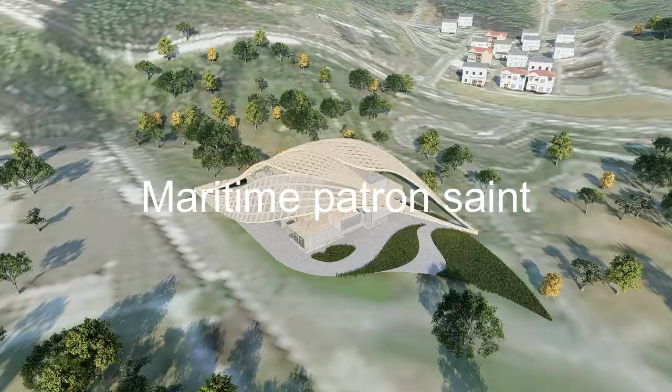To this day, the residents of Kamaishi are still affected by the natural disaster in 2011. Houses were destroyed, environments polluted, and the economy was also affected. Since then, the area has undergone a rebirth.

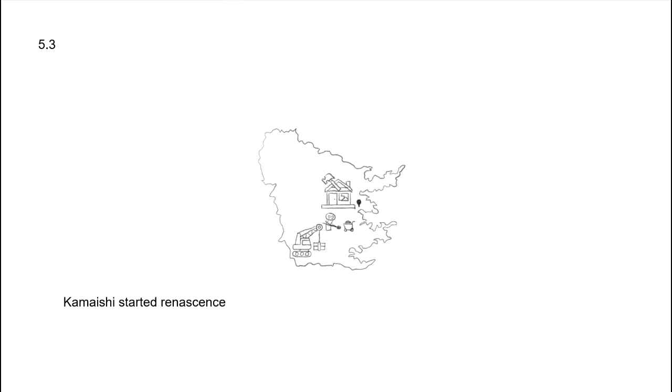However, fewer and fewer younger generations are choosing to live in the area due to the reminiscence left by the tsunami. The flow of people out of Kamaishi has resulted in a gradual decline in economy and the loss of cultural heritage locally. Our design aims to stimulate economical development by attracting and supporting the tourism sector, as well as building a wider community for the locals.

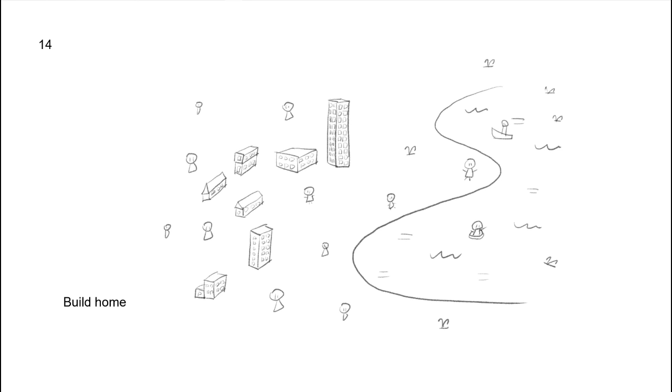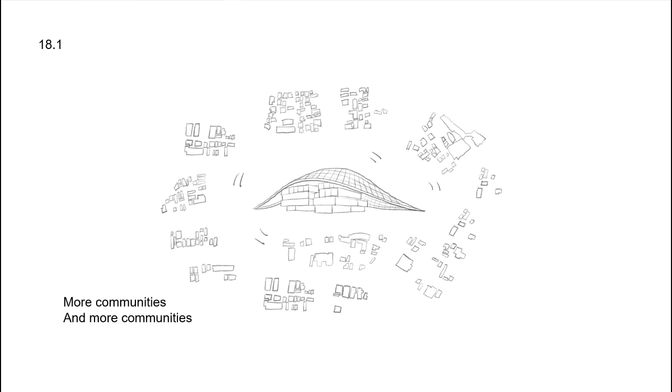Our design makes use of the regional trait of Kamaishi, the Toramai, which embodies local values and captures the essence of rural life. The blending of culture and tourism can be mutually beneficial. It forms a wider community where tourists can learn about the regional traits of Kamaishi, and the locals can develop a sense of belonging and identity.

With the key concept of regional traits and sustainability in mind, we extracted elements from the culture, business, and the surroundings as inspirations that run through the entire project. From a cultural perspective, we chose the Toramai. It is a traditional dance in Kamaishi and translates to tiger dance.

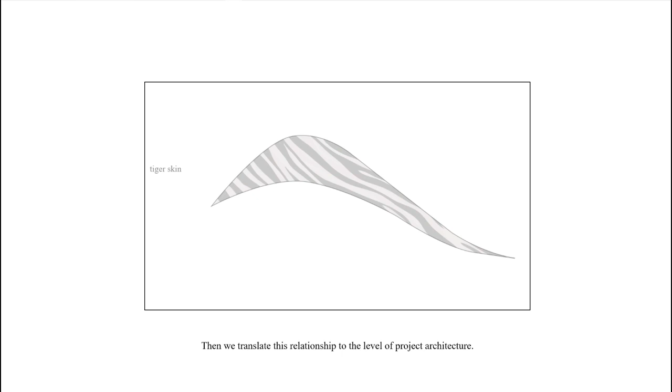During festive times, the Toramai teams can be seen throughout the day and night practicing and performing in the streets. They are accompanied by taiko drummers, bamboo flute players, and singers. Tiger dance groups will travel along the main streets, entering businesses, and will perform a short dance to people inside, and this is viewed as a blessing.

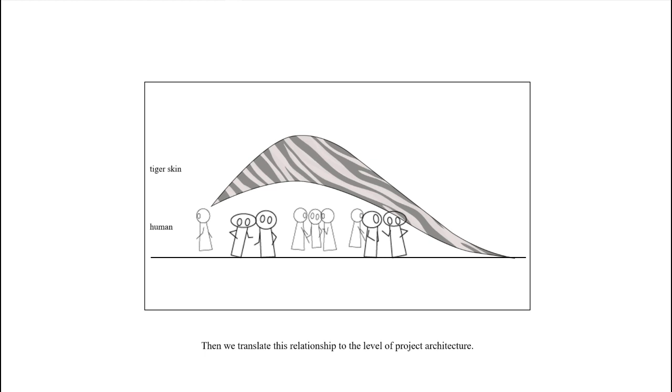The dance is performed every year around the 25th of August to offer blessings to the dead after the tsunami.

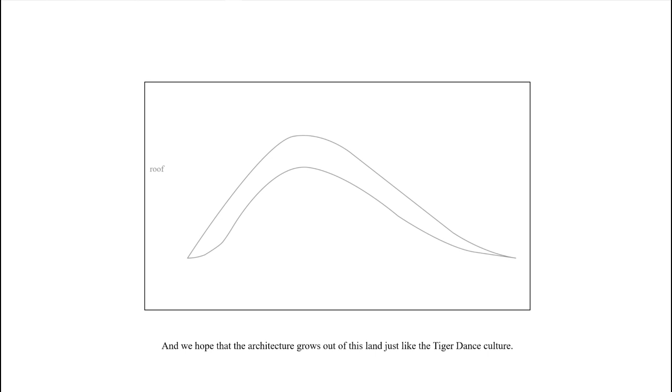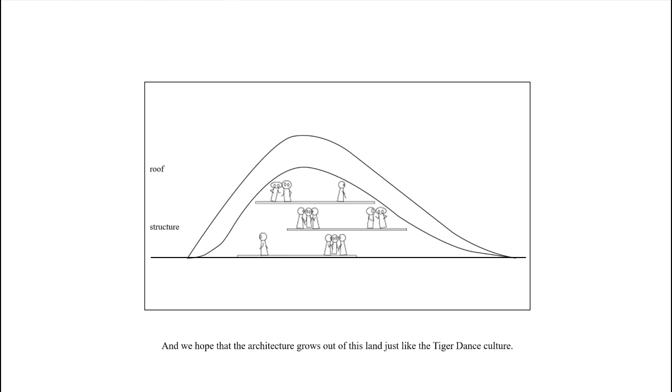We abstracted the relationship between the tiger skin and the performer in the Toramai as a dynamic pattern of a building roof. From a commercial point of view, since fishing has always been an important local industry in Kamaishi, we took inspiration from the weaving of fish nets as the roof structure of the building.

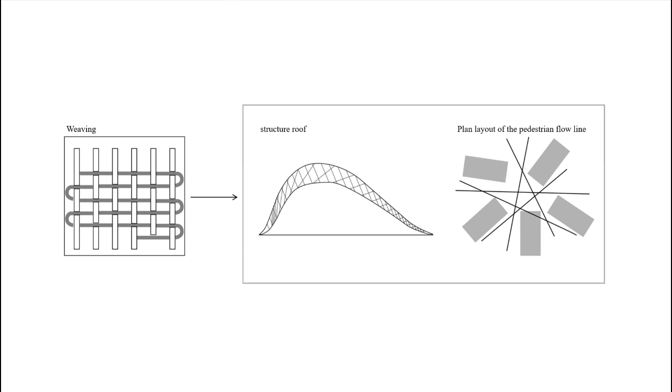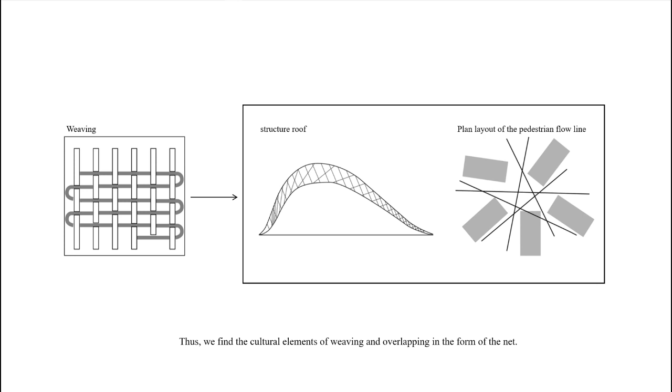Lastly, taking inspiration from the surrounding environment, we used the transport containers seen in the docks as the indoor architectural space. Here, AP can host educational events as well as hold spaces for equipment storage.

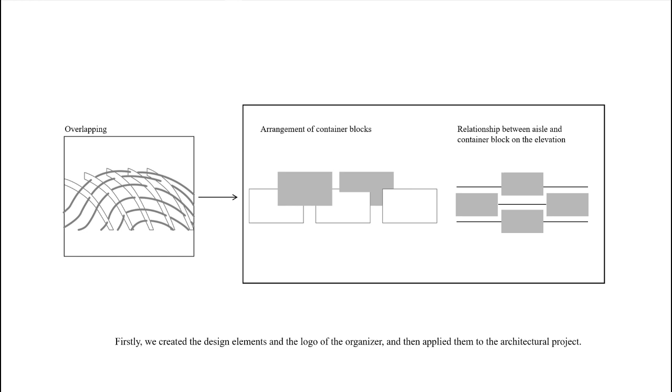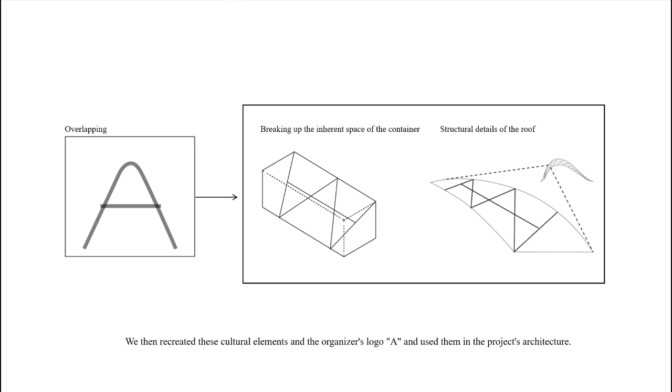Therefore, the interpenetration of the roof and the container will create many overlapping, multivalent, intermediary spaces. The roof exposes many openings in the building, where the interior is visible. So this approach not only increases the communication between the people, but it also increases the communication between the architectural space and the surrounding scenery.

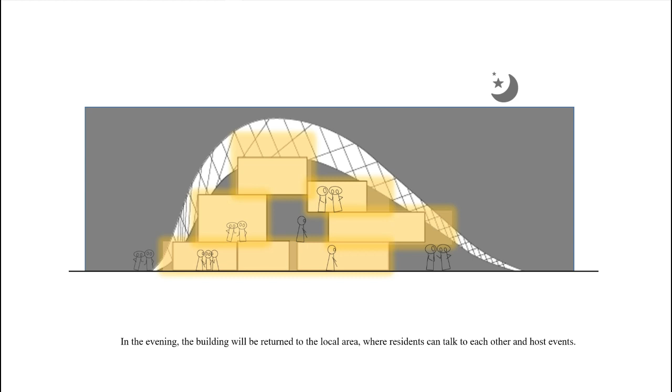In addition to enjoying the educational space inside the building, people can also feel the sea breeze and enjoy the mountain view in the intermediate space within the building. During the day, the building acts as a place for tourists to visit, learn, and experience. At night, it's returned to the locals where they can host activities and events.

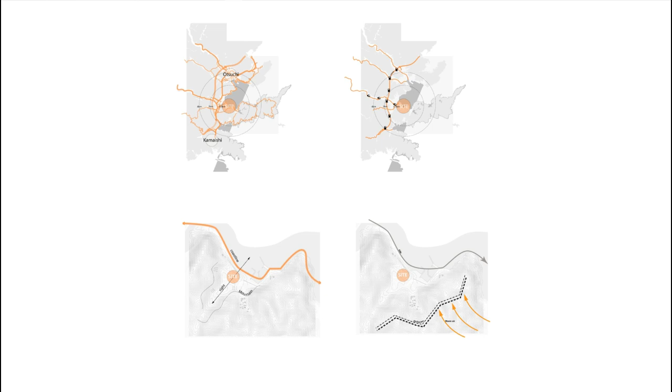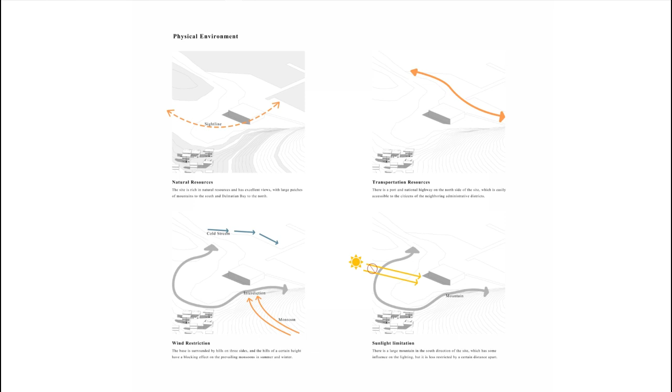Now I will explain the thought process behind how the building was constructed. The location of the site is excellent - it's low on the northeast and high on the southwest with a flat terrain. So what this means is that it offers both mountain and sea views. Further, it's close to the main road, so transportation is convenient.

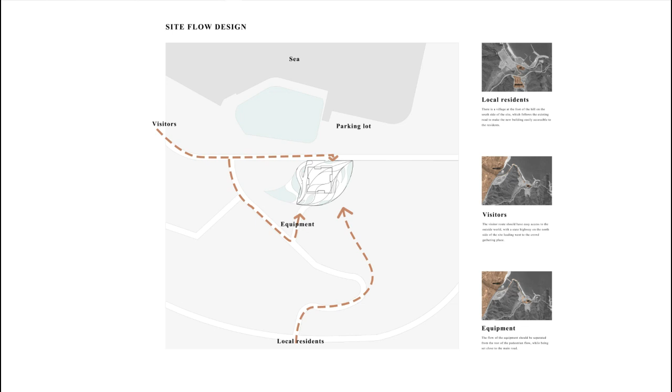And after careful consideration, we also added a branch road to the south side, so local residents do not have to detour. And this also separates the equipment transport from the road for the local residents.

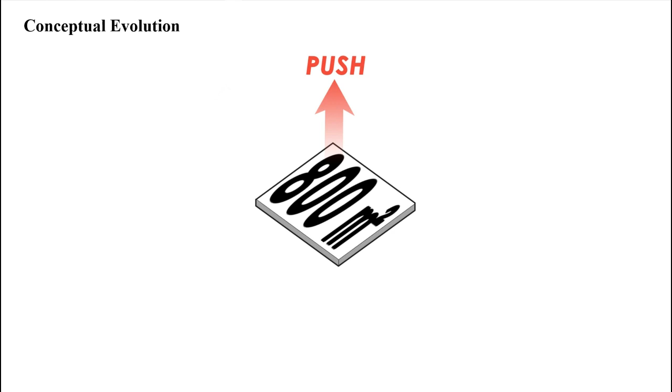From the building blocks, we consider two parts: the generation of the interior of the building and the evolution of the roof shape. So why was it a vertical distribution? First, the space was quite limited, and second, certain functionalities required a certain height to be satisfied.

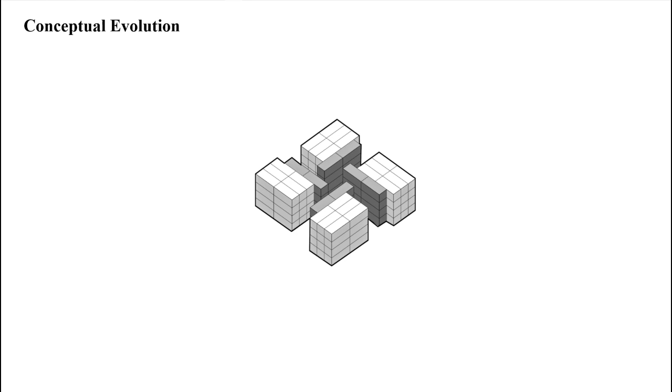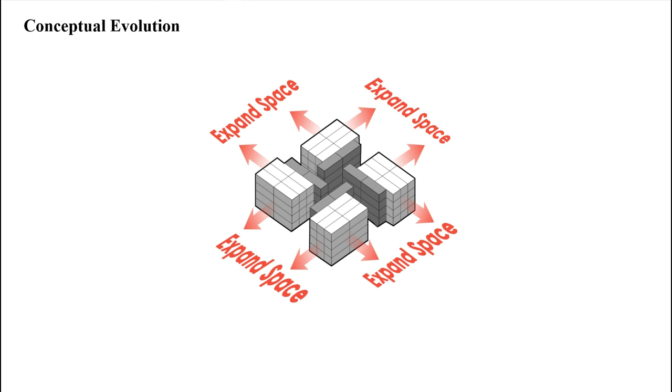So how is the initial building block generation considered? We believe that the volume of the building evolves on the basis of a windmill-like layout. This is done to form a core space where more people can participate. At the same time, in order to allow all participants to view the mountains and the sea, the volume was set back and misplaced, which makes the volume of the whole building look very rich.

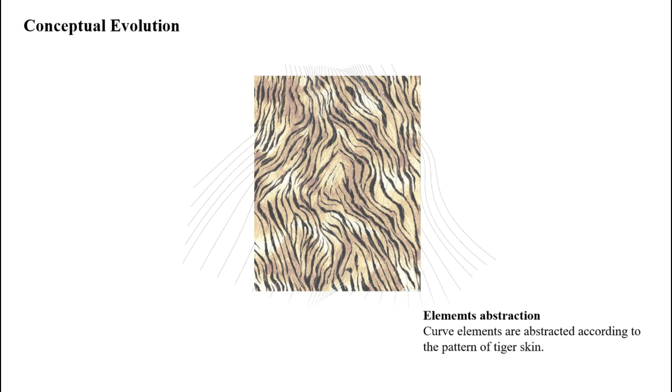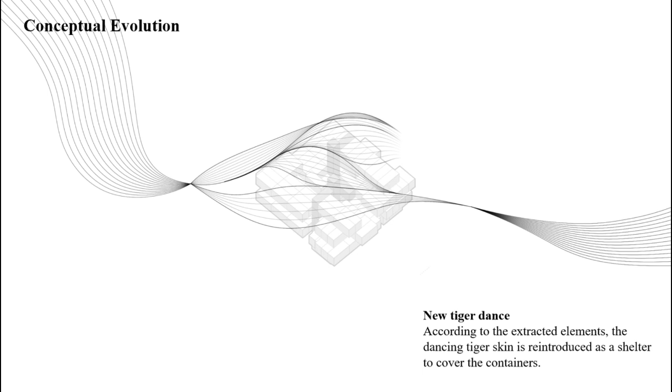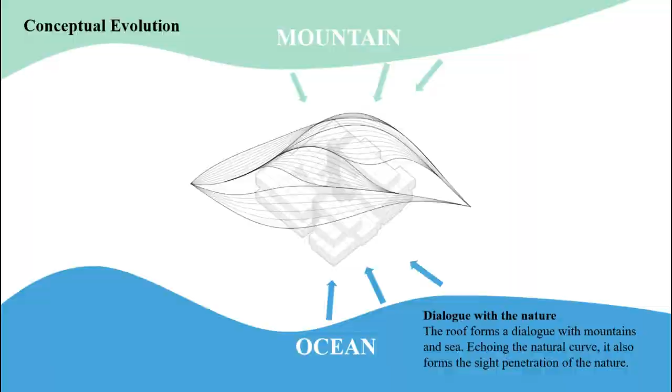So we chose containers because we want to adopt the concept of ecological sustainability and use containers of the uniform international size. The container itself is very strong - the load-bearing capacity is even higher than that of ordinary buildings, and it also has anti-corrosion and certain fire protection properties. The cost is cheaper than traditional buildings, and it can be reused without generating too much construction cost.

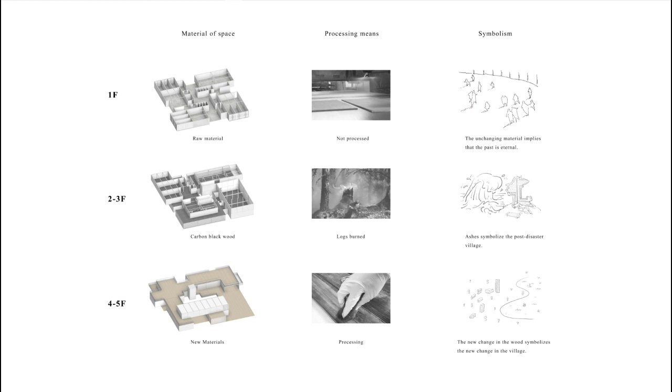In the choice of materials and the spatial distribution of the interior space, we try to use the narratives of vertical space to represent the surrounding history and the future expectation of place. Therefore, the three spaces we have divided are the equipment space on the ground floor, the education space on the first and second floor, and the tourist space on the third and fourth floor.

So we hope to use local materials to divide them so as to add a progressive narrative structure in response to the 2011 tsunami, thus allowing the vertical spaces to overlap.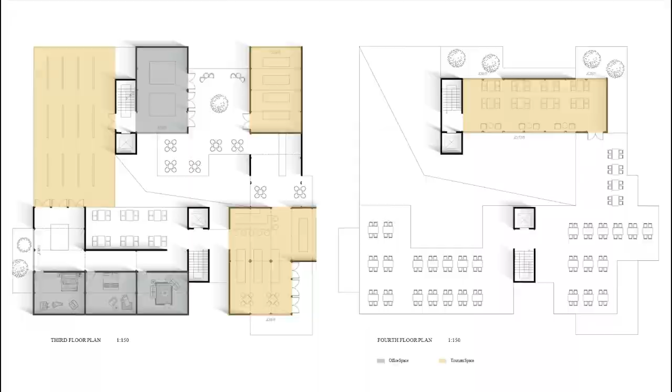For the ground floor, we wanted to use raw materials to abstractly translate the history of the local disaster in the area. On the first and second floor, we wanted to represent the current state of the area with fire-burnt wood, which left traces of damage done to the area.

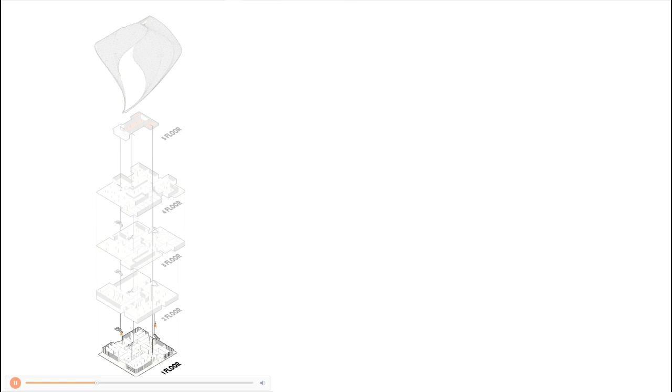For the third and fourth floor, we have used new timber to echo our hopes for the area and to symbolize rebirth. The use of the space is also flexible and overlapping, echoing our elements, and the furniture is placed with a variety of local weaves in mind.

The semi-outdoor intermediary space created by the roof is also a visual dialogue with the ground floor space and can be flexibly adapted to different activities.